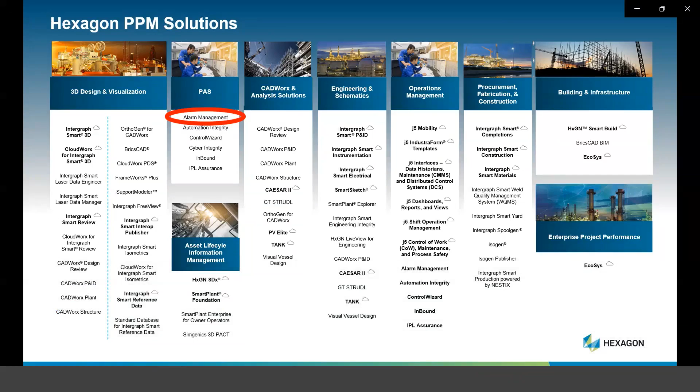In the late 2000s, PAS was approached by the Electric Power Research Institute, which you may know—a lot of power companies belong to that and look to them for help learning about technologies they can't develop themselves. EPRI was looking for good advice and documentation on how power companies, particularly generation, should do alarm management. So we worked with them to develop the first alarm management guideline issued by EPRI for power generation. After that, we worked with them on a lot of alarm improvement projects at specific power stations, and did webinars both in the US and other parts of the world like Australia. A few years later, we helped them write the alarm management guideline for the power distribution sector, which is quite different, but not our topic today.

Alarm management is about making the operator successful. It's about giving them a system that helps them understand what's going on and alerts them to abnormal conditions. When the operator is successful, all the great things we want happen: stable operation, good efficiency, staying within safety and environmental boundaries, avoiding trips. All of those things require a good information system for the operator, and the alarm system is one of the most important parts of how we do that.

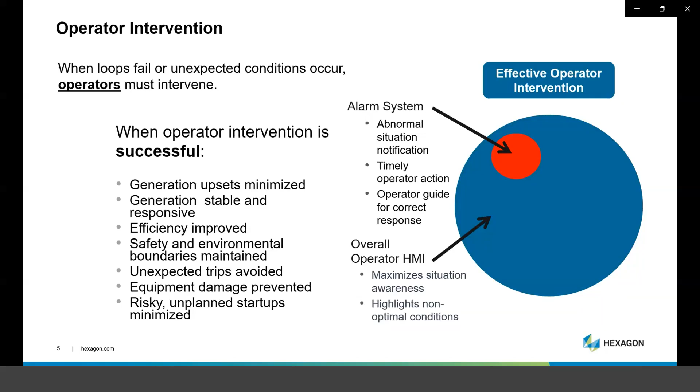There is a work process for solving the alarm problem. It's proven in hundreds of successful projects all around the world in all kinds of different industries. Millions of alarms have been dealt with and improved by this process, and it's a simple, straightforward 7-step process. We're going to go through each of these steps and discuss them in detail, but they're specifically designed to be efficient and give you the most bang for your buck, particularly up front in getting started and seeing results almost immediately.

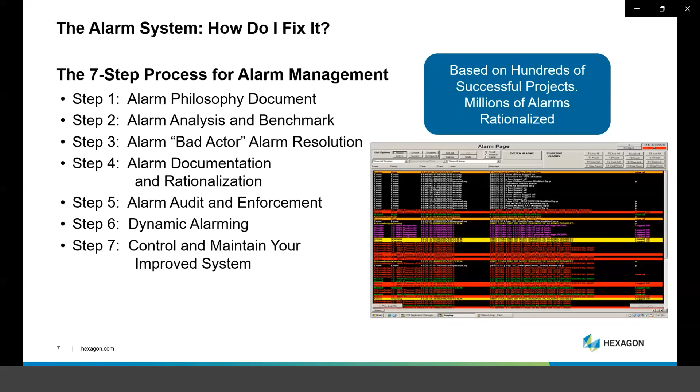Most places, when they first get involved with alarm management and start looking at their systems, they're up at 2,000 a day, 5,000, 10,000, 20,000, in some cases even more. We've seen a lot more than that, 100,000 alarms per day. In that case, you are going to literally have thousands of alarms every week that your operator may not have been aware of because the alarm system is just overwhelming them. So that's what we would call unimproved.

A couple of thousand alarms a day is very typical. 2 to 10 to 20,000 is very typical for power plants. I'm going to show you some data shortly.

So let's start with our work process. Well, the first step of our work process is really 3 steps that we do in parallel. We can start them all at the same time. These are alarm philosophy development, analysis of your alarms to find out your problems, and something we call bad actor resolution.

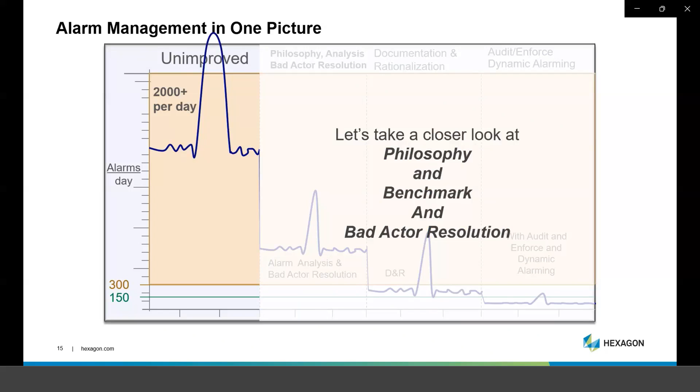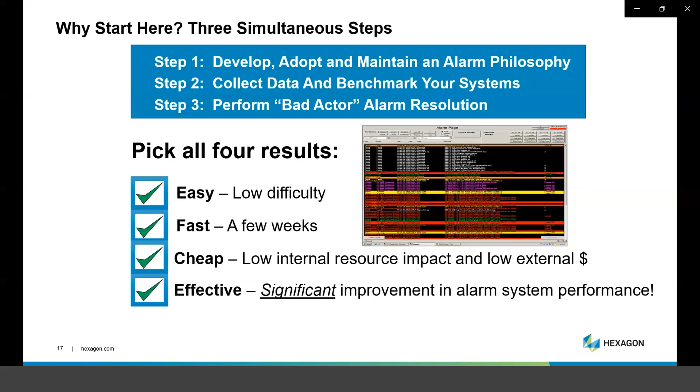Well, why start here with these 3 steps? It's because they work and they have several advantages. They really front load the benefits that you get. It does not take a lot of internal resources to accomplish them. You don't have to write big checks to external agencies to accomplish them. They're fast to do, low difficulty, and they work. They give you some really significant improvement in your performance in a short amount of time. And we, being very practical engineers, are always interested in that. So that's why we start here.

So the first thing is the alarm philosophy document itself. This is a highly detailed document. This is not some 4-page document from corporate saying, gee, you really ought to do alarms right, you know.

So it's going to be comprehensive. It's going to be tailored to your specific work practices, the way your company is arranged, the way tasks are allocated between the maintenance department, the engineering department, the operations department, and so forth. So it's got to be specific to address that.

The more detailed you make this document, the better off you will be, because a more detailed document has you think about things up front, and you won't have to think about them later.

We're talking about a 50 to 80 page document. It might have some specific appendices about your own control system, and it is a mandatory requirement of the ISA 18.2 alarm management standard. More about that later. So you don't have to reinvent the wheel on this. Hexagon, we have full instructions for you on how to develop an alarm philosophy and what should be in it.

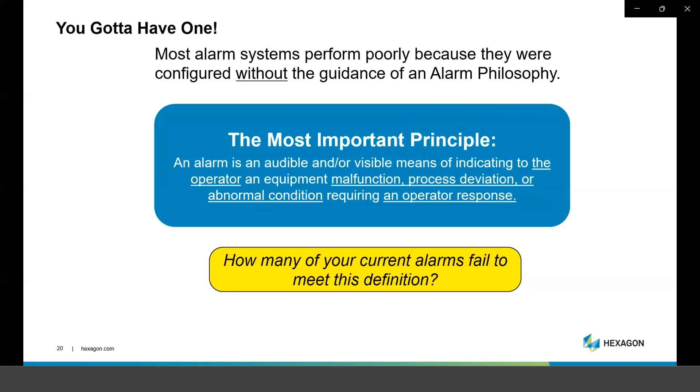As one example of the kind of contents of your alarm philosophy document, you'll have a section on how to determine and use alarm priority, what it is, how it works, how the operator utilizes it.

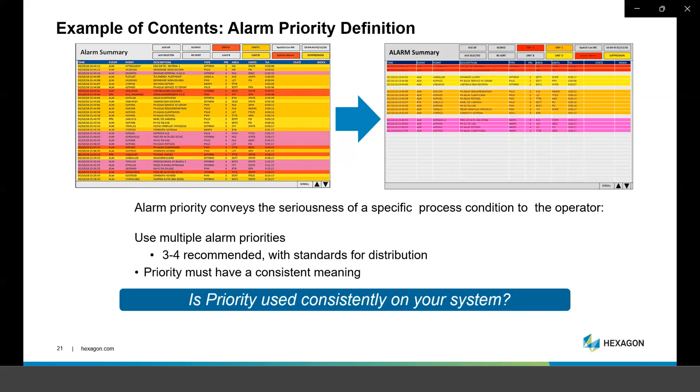Your control system may have 3 priorities, it may have 24. You're going to make decisions as to which ones you use, how you use them, how they're annunciated. In general, the use of 3 or 4 is recommended, and there are some standards for the distribution of those. It's just really important that priority has a consistent meaning throughout your system, and if it doesn't, it will not be effective.

And the combination of those two things drops down into a grid where you decide is this a priority 1, 2, or 3 - low, medium, high, whatever the designations on your particular control system are. It's very straightforward, doesn't take a lot of time once you get your grids correct. And that's an upfront discussion that's going to be in your alarm philosophy.

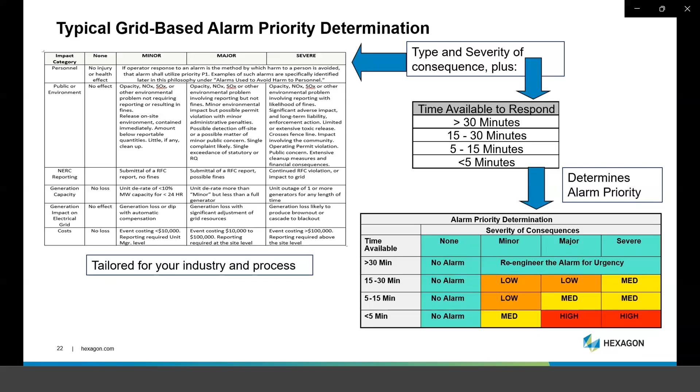Here's another great thing to have in your alarm philosophy that will save you a lot of work. You want to look at predefining a lot of alarm design cases. You don't have to consider each and everything individually. You can think about a lot of your alarm situations and decide what is your strategy for the design of alarms like that.

Okay, typically what about your bad PV alarms? This is alarms indicating that an instrument is not working or has gone offline or something - bad value, bad measurement, bad quality, all those kind of things. How are you going to do those? Are you going to do those on every point, only some points, whatever? Pre-alarms, duplicate alarms - a whole set of different strategies for different conditions that you can decide up front, and then you apply to all of them.

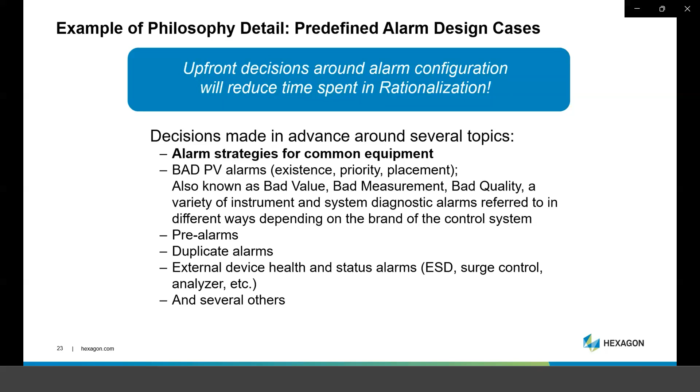Here's another example of something you should have in your alarm philosophy. You should have explicit instructions on when and when not to use a combination alarm - that is a high-high or a low-low on an analog signal. You never should assume that they're both going to exist. If you have a high alarm, you may not need a high-high. You only incorporate a high-high if the action the operator takes for it is significantly different in kind or degree than the action they were supposed to take for the high alarm. Only if that is true do you justify having a high-high or a low-low, same thing.

Our experience is that you will eliminate about 90% of all the standard combinations that people just do by rote if you follow this guidance, and it makes the system far better. You don't have operators waiting for the high-high to take action and that kind of thing.

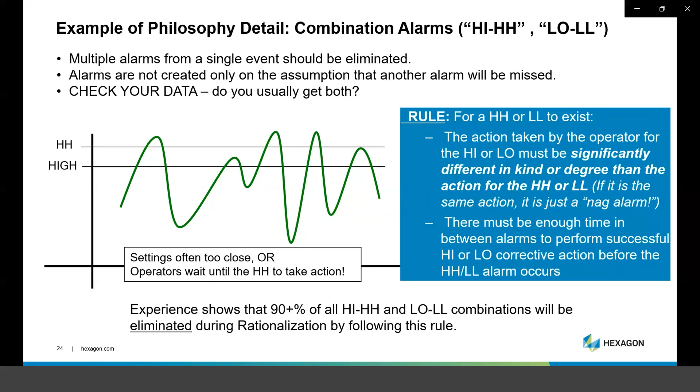Step 2 is alarm analysis and benchmark. What this means is we're going to grab a lot of data from your alarm system and analyze it in a lot of different ways. We are probably going to find that your plant will have the same problem that all the other plants in the world has, but you will have a different focus and different issues will be different on your system than the one down in the next state.

So there are a variety of metrics - these are the metrics taken from the ISA 18.2 standard. They're recommended, not mandatory, but in general you will want to measure these things and see how you are doing compared to these target values. And if you're exceeding these target values or have some kind of issue, you want to have some kind of action plan in place to get you back in line.

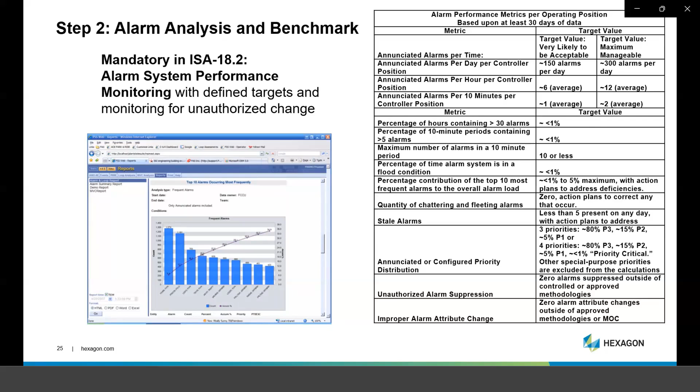All right, so let's take a look at just a few of these metrics. The best one is this alarms per day. We like to look at a month's data, at least 30 days, whatever, and just chart how many alarms you're getting a day. And at the bottom you've got your 150 and your 300.

So on day 1, where the operator got 3,000 alarms that day, how many of them did they really look at? Could they really look at? It's not the operator's fault if he misses an alarm when you're presenting 3,000 a day, or 15,000, or 30,000. So this is the first thing, and it really gives you in one glance an idea of how well off you are or how bad off you are.

So here is some data. Now we did a lot of projects with the Electric Power Research Institute, where we went to some of their member plants and did improvement projects, and we kept a lot of data. I'm going to show you several charts like this. This is a chart of 15 different plants. So you might say those should be bar graphs instead of a line, but it's 15 different plants. What we have here is the initial alarms per day from when we walked in, of 15 different plants, 5 of which happen to be combined cycle.

So as you can see, the first plant we were in - and they are there along the bottom, kind of concealed, we're not going to tell you exactly where they were - had about a little over 10,000 alarms a day for a single operating position. Obviously a very bad place to be. Went into a combined cycle plant with just under 10,000.

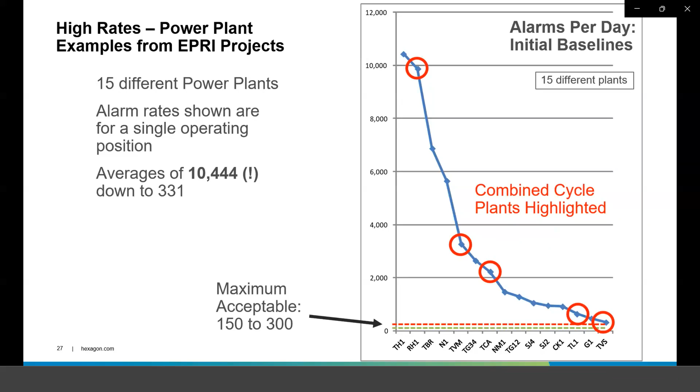And major accidents, when you look at the alarm data leading up to them, are often in a severe flood condition. So certainly it's not helpful for anything like this to occur, and it's one of the things you analyze for.

We like to look at floods. We look at how long they last, how bad they are. And then we like to look at the percentage of time that the alarm system is spending in a flood condition where it's really not useful to the operator. And so that's a useful measure. That's the one at the bottom.

We have, like we often find, a system that's in flood for around 7% of the time, maybe 20% of the time, maybe 50 or more. It can get very bad.

So there are examples of analyses that we do for that. In taking that measurement, and we're looking at these power plant data, here's the very top one there. A combined cycle plant was in alarm flood 95% of the time. In other words, you have an alarm system there that is a total nuisance to the operator and is totally unhelpful to them. Not a comfortable place to be if you're the manager of such a system.

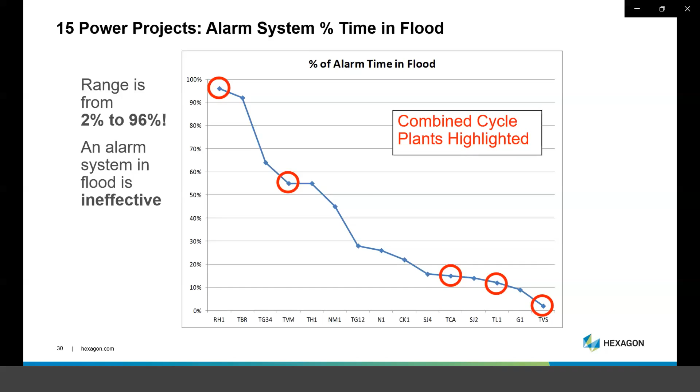The other thing we like to look at is what are our most frequent individual alarms. This will always give you some surprising data. For example, look at this chart here. Here's our top, we call these our top 10 alarms. What you will generally find is that they go off and constitute generally 25 to 80% of the total alarm load. All right, that is surprising.

That means if you could make 10 alarms work the way that they should, you could drop your alarm load by 25 to 80%. There's an alarm right there on the far left that went off. I think this was about a month's worth of data. That alarm went off over 16,000 times.

Now, I would say, could you design an alarm that would go off over 16,000 times? You know, maybe not, but somebody figured out how to do it, and we always see this. It probably didn't really need to go off 16,000 times in the month.

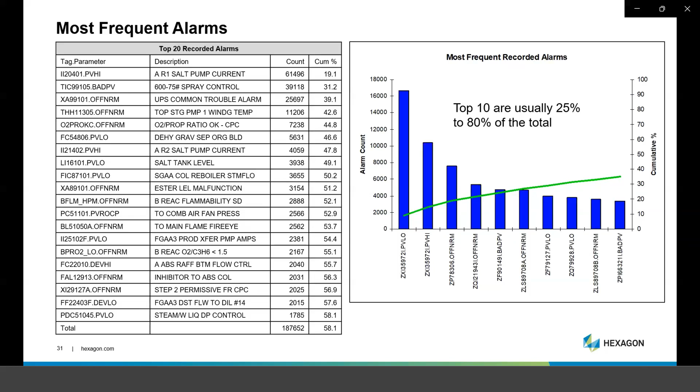So we like to look at those, identify those, because that leads right into our step 3. All of this is done by software. You do not want to assign some poor person to be doing all of these alarm analyses using spreadsheets and trying to dump data and parse it. So very sophisticated software exists out there to do all this for you.

We have such software, other people do, where what we do is we automate all of this. We do it periodically. It generates reports periodically. It either emails them out or publishes them to your intranet, to internal websites and that stuff, so you can compare and see how things are going. But you really want to automate this step.

So having identified those, we will immediately do step 3. We're going to find them and fix them. These are your bad actor alarms. We're going to work on maybe the top 10, 20, or 30 or so. And that does not take a lot of time to do. That is not difficult to fix these things.

Here's an example. I think this was 8 weeks of data, and you had one alarm there go off 170,000 times. 6 of these top 10 alarms are individual instruments that are malfunctioning, and every time they malfunction, they generate an alarm. You know, that can be fixed.

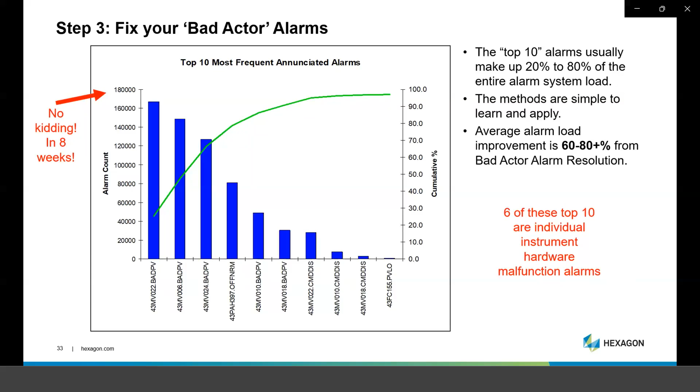Your expected gain, we've done this process many times, is going to be 60 to 80% from resolving bad actor alarms. This can be accomplished by one person part-time in just a few weeks.

We are talking about chattering alarms, the kind that go on, go off, go on, go off, constantly chattering. Fleeting alarms come in, last only a few seconds, and go away. Obviously, an alarm that lasts only a few seconds and clears cannot have cleared because the operator did something. So these are alarms with some other kind of behavior problem.

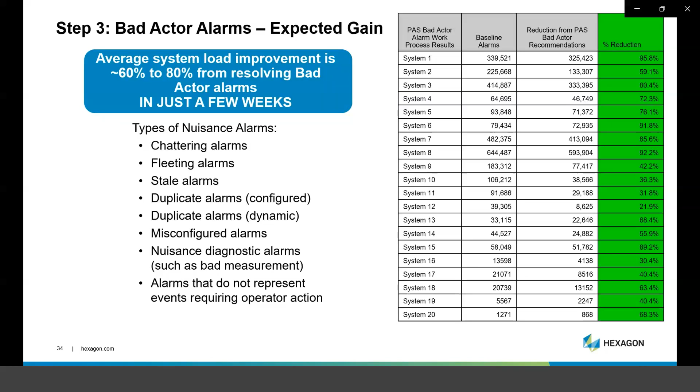Stale alarms come in and last for days, weeks, months, even years. We've seen those. Duplicate alarms tell the operator the same thing. Misconfigured alarms, nuisance diagnostics - all kinds we've written whole chapters in the book about how to fix. The information for fixing them is out there. It only takes the will to do so.

So when we look at our group of 15 power plants again, we look at just the top 10 alarms in each plant and how much of the load did those constitute. The one on the left, the top 10 alarms were over 80% of the total system load. In other words, you could have dropped the alarm rate by 80% on that plant from fixing 10 alarms. On average, these were about half the load - half the total alarm load at all these plants came from 10 unique and individual alarms at each plant.

Combined cycle was up there at the top, down there in the middle, and down there at the low part. But still, look at those two low ones - the top 10 alarms were almost 20% of the total load. If you dropped your alarm rate by 20% in one day, people have gotten special recognition awards for doing that, and it is not difficult.

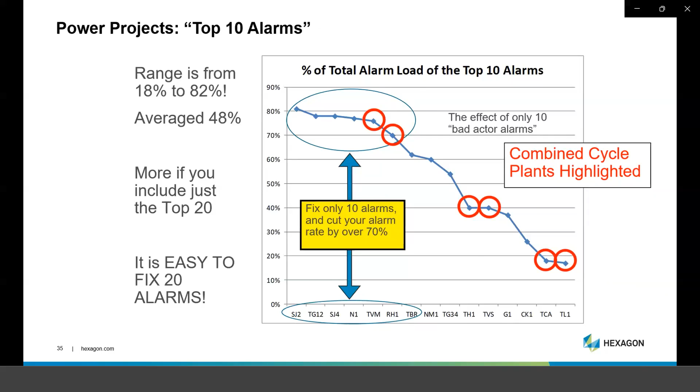So we highly encourage this. That's why we have this as one of the first steps. It's easy to do. Chattering alarms are the worst kind of nuisance alarm.

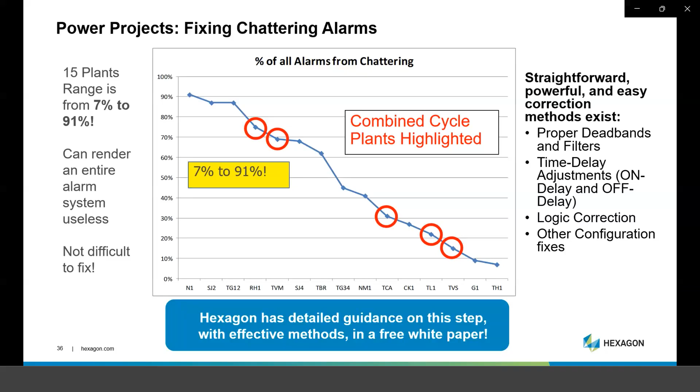Here's the percentage of all alarms that come from chattering alarms, and it's the same kind of thing. There are ways to fix chattering alarms - they involve using configuration parameters on the DCS like deadbands, filters, time delay adjustment, and some other things. Hexagon has detailed guidance on this step with effective methods to do it, available in a free white paper we'll show you where to get at the end of this webinar. Having done those things, it's very easy to accomplish a 60 to 80% improvement.

So let's look now at this next step, alarm documentation and rationalization. This is another ISA mandatory requirement - it is in your future, you are going to have to rationalize your alarms. What you want to do is to do that effectively and efficiently. When you do it, you're really making sure that your actual alarm system is in alignment with the new alarm philosophy you've written.

So you're going to go through a team effort to implement the philosophy, to come up with the changes in your alarm configuration that reflect your philosophy. You are not going to do this one alarm at a time and implement it directly on the system. Instead, you'll come up with a total list in a database of what you're going to change from and to on each alarm. Then you'll have proper training for the operators so they know what it means when you do the implementation.

You're going to make your priority effective, your alarm settings consistent, and create a master alarm database - another ISA mandatory requirement - which is a reference useful for a whole bunch of things, more than I can describe in this short webinar. But it is going to be the basis for you to know if your management of change is working.

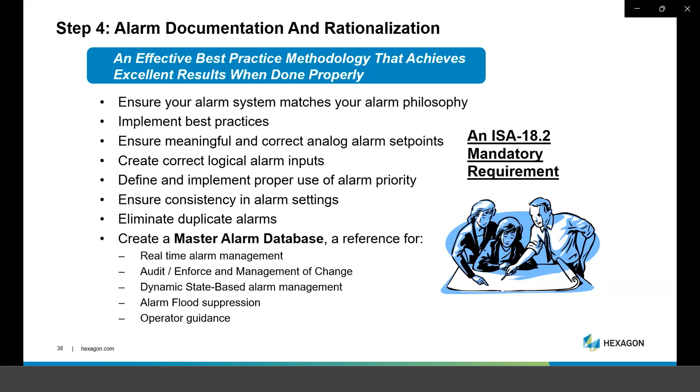And we'll show you about that in a moment. So we are going to have a team-based effort to do this.

You're going to look at each of your alarms. You're going to decide, well, should this alarm exist at all? Does it indicate an abnormal condition? Does it require an operator action? If it doesn't, you're going to mark it for deletion. It should not use the alarm system.

Now, that's not to say that it isn't indicating something that's important to the operator, but it doesn't necessarily qualify to do that by using an alarm. That's why you have process graphics and other ways to tell the operator what is going on. Not everything needs to be an alarm. An alarm is an intentional interruption to the operator. It's saying, look at me, I'm important.

Well, the fact that something you've automatically programmed to go from step 1 to step 2 has operated successfully doesn't mean you should have an alarm to say thing A has gone to step 2. You might need an alarm that says thing A was supposed to go to step 2 and it hasn't. That's a different thing. So you're going to look at process history to determine your set points.

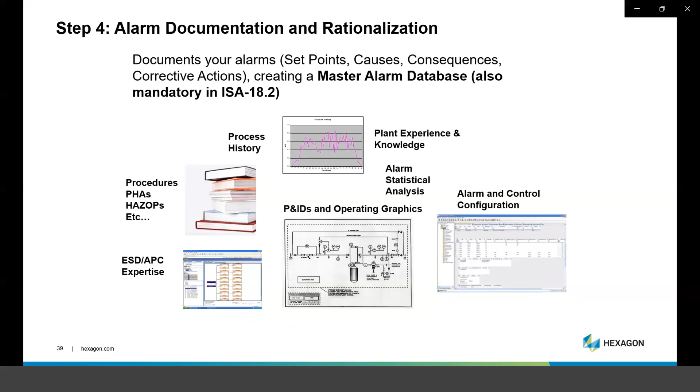You're going to look at a lot of things. This is a team effort, and it can take a while, but there are ways to do it efficiently as well, and we've written a whole chapter about that.

An example of this is you're going to determine where your alarm set points need to be. Now, you may have equipment, and it may be from the manufacturer about your equipment that says where they need to be, and so that could be the answer. And sometimes that is the answer, and they're not there, and you need to change them.

But you're also going to look at where does your process like to live, and you don't want to set your alarm right in the middle of that normal operating zone. And you would think, well, nobody does that. Well, believe me, everybody does that. You're going to find a lot of your alarms when you look at your data that are just right in the middle of your normal process variation, and that's not what you want to have.

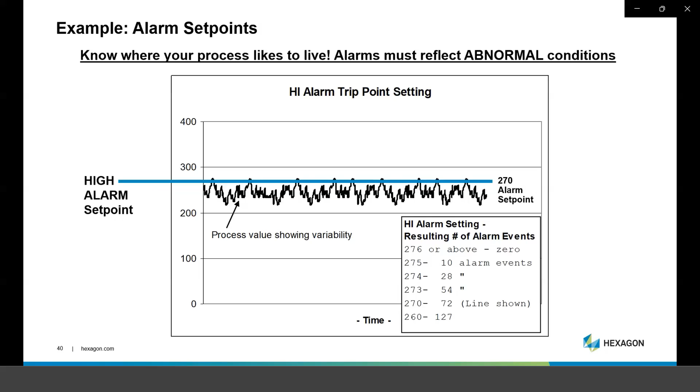Your output of this is a master alarm database. The right database tools in doing this and documenting alarm causes and consequences and corrective actions and set points and all of this stuff, the right database tools will save you time and money.

If you try to do this using Excel, something like that, you're just going to waste a lot of your own time and money, and you won't have a product in the form of a master alarm database that is very useful for you going forward. And believe me, there are a bunch of great uses you can make of that information.

One of those uses is, in fact, to expose it to your operators. And we're not talking about in some 2,000-page book that sits in a closet. We want to integrate this in.

For example, if the operator is looking at a graphic and there's an alarm on that, it would be nice if they could simply select that alarm, and a faceplate could be called up that retrieves data from your master alarm database that shows them, well, what are the common causes of this alarm? What are the consequences? What do I need to do about it? Maybe even link to a procedure.

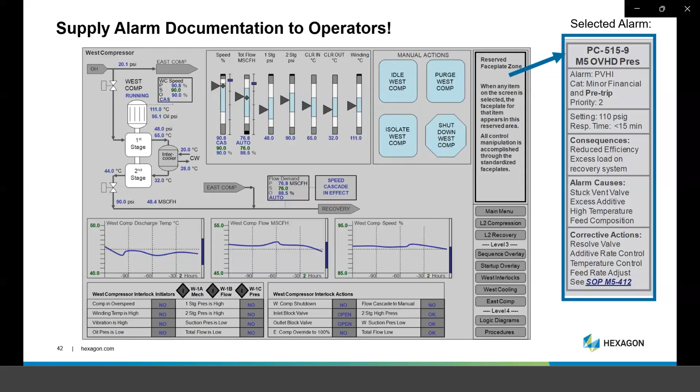This is a very common thing that people are doing, and it's one of those things that helps make your newer operators as effective as your more experienced operators. They can see what this team of experts had to say about every alarm with just a click. So this is a highly useful thing to do. To do that, you need a database.

The results of alarm rationalization are consistently reported by the people that do it in a positive way. The alarm system makes sense. It's useful now. It sure wasn't before. All these kind of quotes.

And the other thing that you see is that the benefit of doing alarm rationalization goes beyond the alarm system. The quote there you see from a chemical company ops supervisor is quite typical. It gave them insight. It showed them mistakes in their P&IDs.

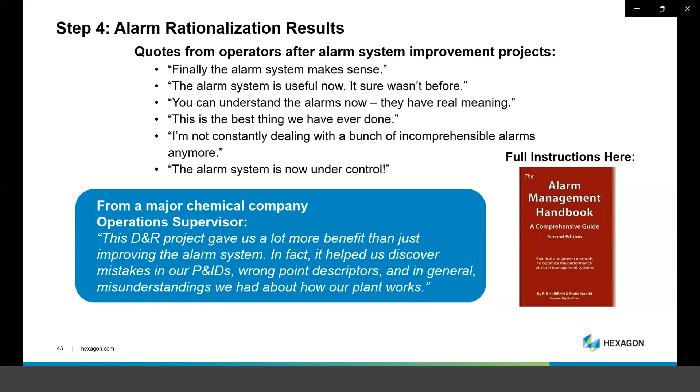In general, there were misunderstandings between engineering and operations as to how the plant actually worked, and the alarm rationalization exercise helped reveal that. So everybody's happy once you're finished with alarm rationalization, you're glad you did it. Some people like to avoid it.

It does take some time and effort, but there are ways to do it efficiently that we wrote about. So what good does it do in terms of these 15 plants? Well, what we look at is the percentage reduction in configured alarms - how many configured alarms did I have before and after the rationalization effort. Generally it's quite significant, 16 to 92% reduction, meaning a lot of the alarms configured in the system were totally unnecessary, did not meet the definition of an alarm, or were duplicates of things that did meet the definition of an alarm.

So here you can see the combined cycle plants. We had 4 examples of that: 75, 62, 26, 16% reduction in the configured alarms.

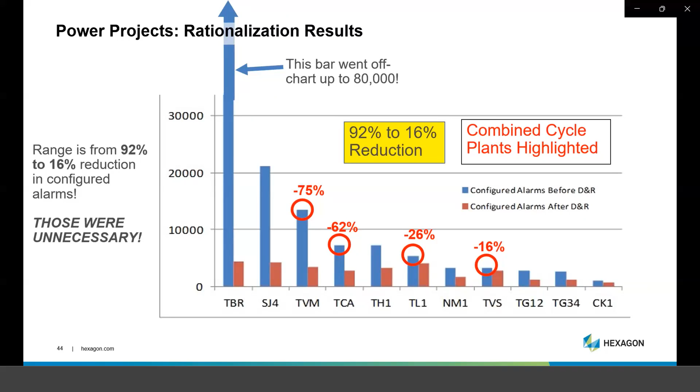So what is the next step? We want to look at alarm audit and enforcement. Because what we have typically found is that there's often poor management of change control of the alarm system, and alarm rates will creep back up. Alarms will continue to disappear, to be reintroduced to the system without following the new rules.

So control systems are notoriously easy to change. A lot of people have access to them. The security is poor, it's not very granular. If you hired me to come in as a contractor and work on your alarms or work on almost anything, I would probably have access to change a whole bunch of things that you wouldn't want me to change. Okay, so we kind of need to deal with that.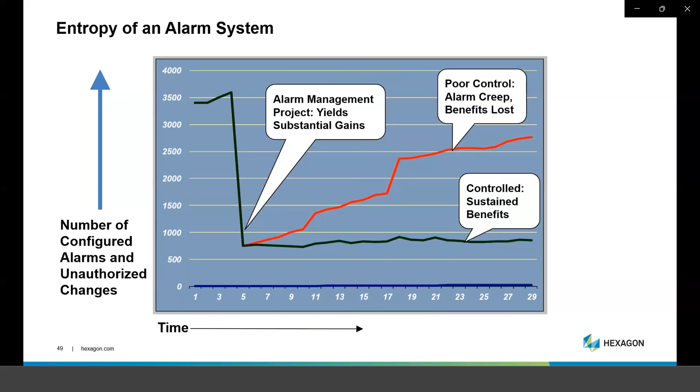Your alarm philosophy represents a bunch of new rules as to who is allowed to change things in the system, and a lot of people don't get that message initially. They've been changing the alarms to suit themselves for years, and that's no longer desired. So what we typically see is that there is an entropy - if you don't do something, your alarm system, after your rationalization, will drift unless you have very good management of change control. You'll have lots of unauthorized changes, so we want to watch for those.

So there's an automated way to do this. You've got this master alarm database that you produced in D&R - documentation and rationalization. Well, you put that on a server. The server has a connection to your control system, and it periodically reads the control system configuration and compares what it finds to the master alarm database. Any changes are unauthorized, because a proper change to an alarm following your MOC procedure should have also changed the master alarm database. So if there's any change at all, it's from somebody that did not get the message and did not follow the rules in terms of alarm system management of change.

Now, you may have a few alarms that are so important to you that it's not enough to just generate a weekly report and have somebody follow up on that and try to figure out who's changing the alarm system that's not supposed to. You may have some that are so important that you say, well, I don't care who's doing it - if we find such an example, we're going to write it back in its correct configuration right away. That's called the enforcement part. Now, you can choose to do that on some alarms - a very few alarms - once a day, once a week. A lot of people run the audit and enforce function every shift, every day, every other day, something like that, and operate on a small subset of alarms that they enforce. So with that technology, what happens is your alarm system will stay for years in the configuration state that it should be, but you still may have those peaks.

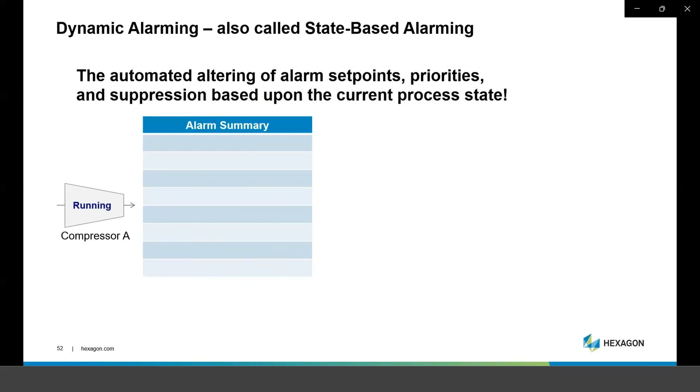Let's say we have a compressor that's running, everything's fine, no alarms. That's exactly what you want. Well, let's say something shuts down that compressor. It could be a lightning strike, could be a variety of things, or an automated shutdown system on low oil pressure.

But when that compressor shuts down, you may immediately get a flood of things you totally expect to happen. Obviously you're going to get low flow, a low discharge pressure and a high suction pressure. Well, those are all irrelevant to the operator. If the operator knows the compressor is shut down, those are all expected, so we don't need this alarm flood.

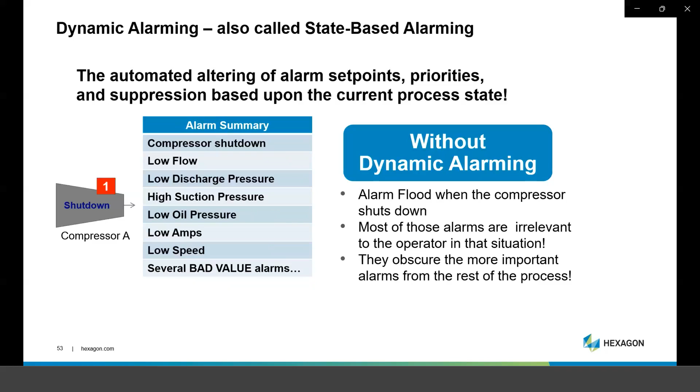What we want to do is dynamically suppress the alarms that are expected when the compressor shuts down. We still alarm the fact that it's shut down, but we don't let all those alarms obscure the important alarms from the rest of the process as it adjusts to not having a compressor there - the ones the operator really needs to address. So we dynamically suppress those, and when the operator is ready to restart the compressor, we unsuppress them, bringing them back without a flood of alarms obscuring the view of other parts of the system whose alarms are more important in the immediate aftermath of the shutdown.

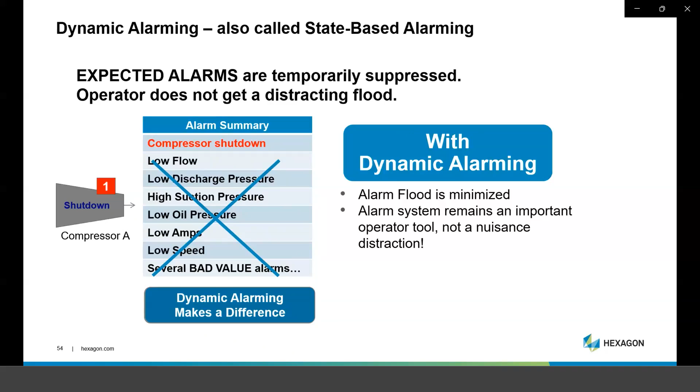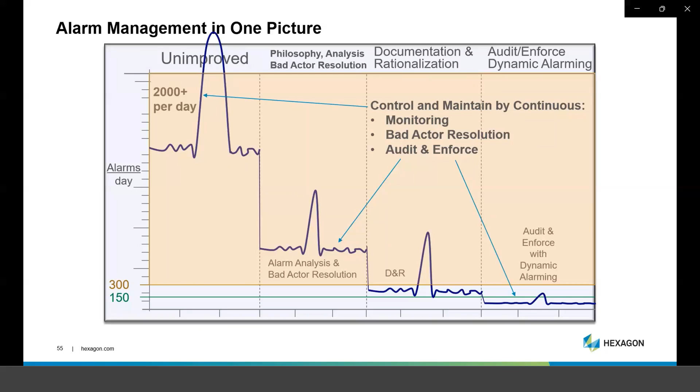So that's an example of state-based alarming. Now we are where we want to be. The objective is just control and maintain. We do that by continuous monitoring of all those measurements in the alarm system - alarms per day, flood measurements, alarms per 10 minutes - we monitor for uncontrolled suppression, unauthorized change, a lot of stuff. And when those metrics tell us something, we deal with it: bad actor resolution, audit and enforce, fix chattering alarms that occur. So that's the seventh step, to maintain that.

There's a standard, ISA 18.2, that came out in 2009. It gets updated about every five years, probably in about another year. It's applicable to power generation, and it does have regulatory impact. Regulatory agencies like OSHA will enforce ISA and ASME standards. Even though they are not regulations, they are considered recognized and generally accepted good engineering practice, and you can be fined and penalized by a regulatory agency for failing to do what a standard says you are supposed to do.

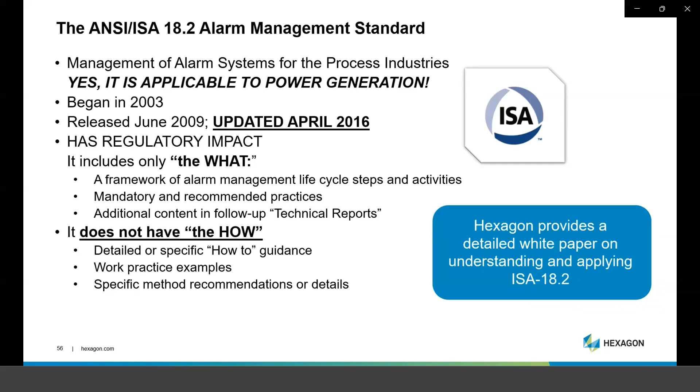So the standard has mandatory contents and recommended contents. It only contains the what, not the how - it doesn't tell you how to solve these problems or give you examples. It just says you have to do certain things. We have a detailed white paper on understanding and applying ISA 18.2, or if you're international, there's an equivalent version called IEC 62682, to help you understand what the standard means, particularly what 18.2 means.

In summary, poorly performing alarm systems are contributing factors to major accidents. This has been proven, these correlations have been shown - many accidents have been analyzed and found this to be true. Alarm management is a very mature set of knowledge and principles. They are well known, easy to apply, and should be applied consistently. This problem has been solved at many places, so if you're just getting started with alarm management, you don't have to go off and experiment. The ways to fix your alarm systems are fully known, so don't reinvent the wheel.

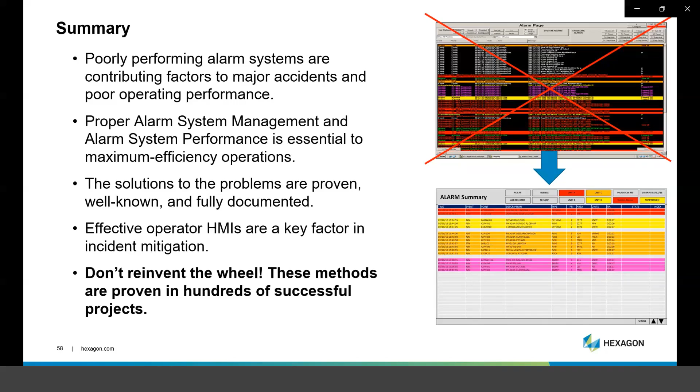We love at PAS and Hexagon to do white papers that are actually usable and useful. These are not papers describing products, they're papers describing principles and methods, things that if you take your valuable time to read, we want you to be able to do something with it right away. That's our goal in writing these. So we have them on all kinds of things, particularly nuisance alarms you might be interested in, understanding the standards, the technical reports that come with the standards, HMI, that kind of thing, and the books are available.

We also have products and services. We have software that does everything you've seen and a whole lot more, and that can actually take you beyond alarm management into such things as boundary management, knowing exactly when your plant is having an excursion from any of your predetermined boundaries. It's very neat stuff you can check out.

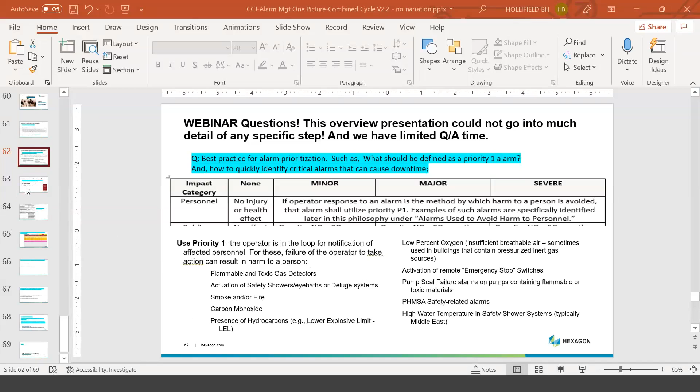Smoke or fire alarms, automatic activation of safety showers, eye baths, or deluge systems -- obviously you want to send help to those areas. If somebody is using a safety shower, that means they've been exposed to something, and you need to send help to those people. Presence of hydrocarbons, and several other things, are examples. If you come up with other examples -- in a coal-fired plant, for instance, you've got coal conveyors with an automatic safety rope attached. If you get your clothes hung up in one, you pull that rope to stop the conveyor, and that should also cause an alarm for the board operator to send help to that area. So those are the kinds of things, and for critical process stuff, that's another consideration.

So, priority one, pre-trip alarms -- you have a lot of alarms that say, for example, low oil pressure. A low oil pressure alarm is saying, if you don't do something about this, I'm going to get to a point where probably the automatic trip is going to operate. So that pre-trip alarm, while the operator still has time to address the situation, is probably going to be a higher priority than the actual alarm when the compressor or device trips. If you can successfully address the pre-trip alarm, you can avoid the trip altogether, so those are much more significant consequences. Now you still need an alarm that something has tripped -- it might or might not be the same priority, but the only thing the operator can do at that point is figure out what caused the trip and get it running again. You cannot avoid all those other consequences of a trip.

We had a question on what are the latest alarm statistic performance values. The guidance in ISA 18.2 is still essentially the same -- I've printed it for you here. By the way, we have white papers on understanding and applying 18.2, with separate white papers on almost every one of these steps we talked about. There's a really good one on solving your nuisance alarm problems and that kind of stuff. So these are the ones -- 150 to 300 a day, that kind of thing -- it's all still the same.

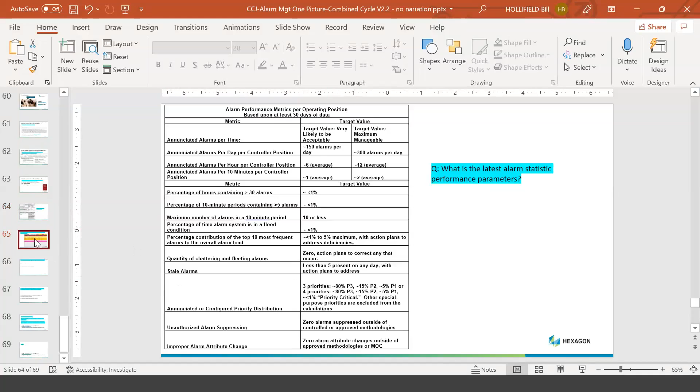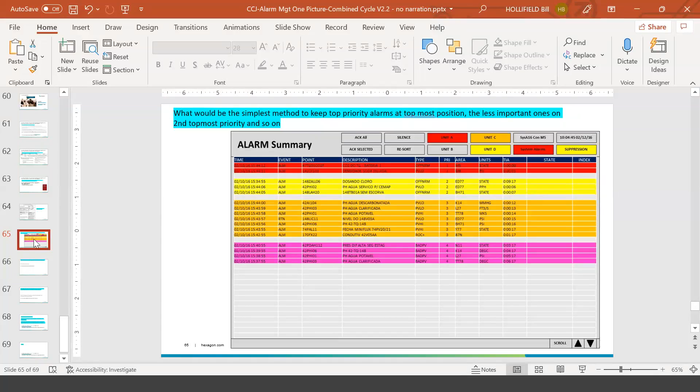So the question is, how do I do that? I'm sorry to tell you the answer, and you're not going to like it, is read your manual. It's different for every control system out there, but all alarm summary screens from modern control systems are generally configurable, and those options are buried in very boring chapters of that voluminous user manual. So pull out your documentation, read the owner's manuals, call technical support for that particular control system, and you can do it. I don't know of any alarm systems you can't make work like this, and it's seen as a best practice.

How do I do alarm management with very limited resources and manpower? Well, start by doing the first three steps—that's why we put them there—and they don't take a lot of either internal or external manpower.

When you get to step four, read all of the material we have about rationalization. We put an entire chapter in the Alarm Management Handbook, based on experience, on how to do it well, how to do it right, and how to do it in a cost-effective way without backtracking and redoing things.

We advise that you get experienced help—people who have done rationalization—to help you work through that process. You'll find it's money well spent. We always say that if you hire us to help rationalize your alarms and you don't think we're saving you way more than you're paying us, cancel the contract. We've never had anybody take us up on that, because it's recognized that with good help from people who know how to do it, you can do it faster and cheaper than trying to figure it out yourself.

We had a couple of comments about state-based alarming—how do you do that? Well, this is a very short webinar, just trying to give you an overview of the entire process. We have separate webinars about doing state-based alarming and how to make it work. If you were to try to do this using the onboard capabilities of your alarm system, configuring internal logic points and all that kind of stuff, well, good luck.

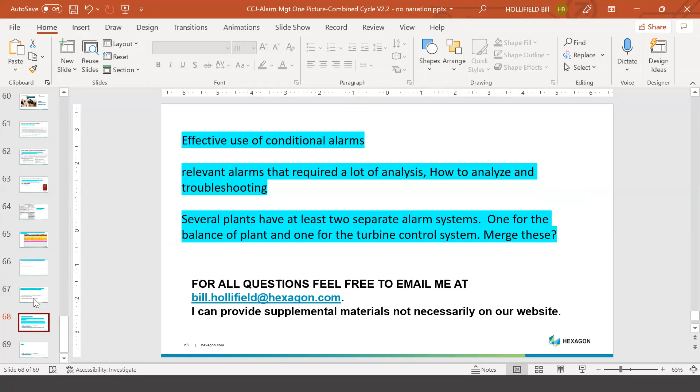Scott, I think we've answered the ones that came in late. Yeah, one just came in from Robert Threlkeld—his two combined cycle plants had two alarm systems, one for the DCS and one for the GE Mark VIe. So that was clarifying the question about the two separate alarm systems.

Yeah, we see that a lot in the power industry, where the turbine controls have their own separate HMI and alarm screen, and the balance of plant automation system has its own alarm summary screen and HMI. Our typical advice—and Bill, back me up or correct me—is to try to have a single consistent interface that the operator interacts with.

A little different industry, but I was once offshore where they had a similar condition with equipment below the water and above the water. I remember interviewing an operator who had an alarm management problem: at one point he'd actually swipe behind him trying to turn the horn off, randomly smacking at the keyboards to silence the alarm from one system without even turning around to figure out which one it was. That was causing problems. So the idea is, when the alarm buzzers go off, you don't want the operator's first reaction to be 'okay, which system is it coming from?'